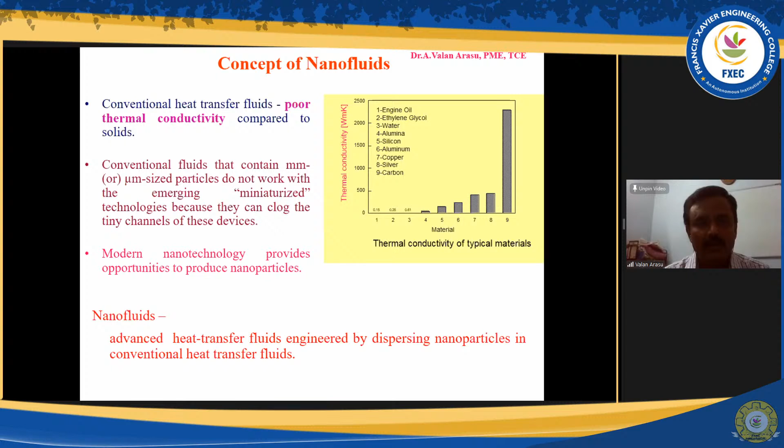But there are certain drawbacks. In this slide you can see the thermal conductivity of solid particles like copper, gold, silver, aluminium—this metallic particles—and non-metallic solids like diamond, silicon carbide, silicon, and metal oxides like aluminum oxide. And lastly, we have conventional heat transfer fluids: water, ethylene glycol, engine oil. These heat transfer fluids have inherently very low thermal conductivities compared to solids.

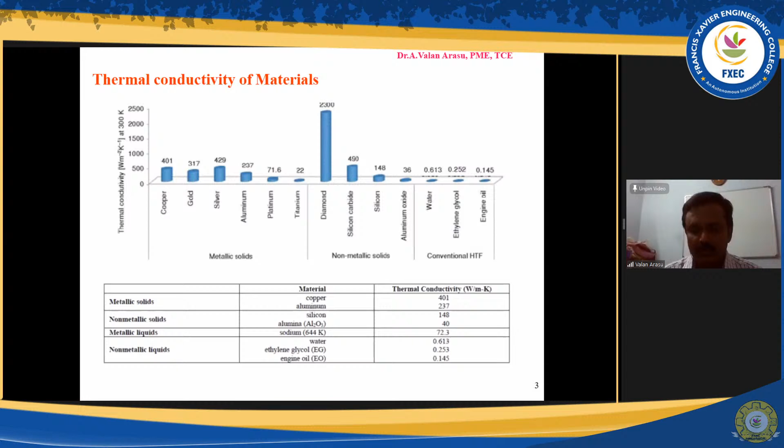So by adding these solid particles, which have high thermal conductivity, into the heat transfer fluid, the effective thermal conductivity of the fluid can be increased. As I said, the feasibility of using solid particles in heat transfer fluid was investigated by several researchers previously.

Some drawbacks with this technology or method: because the particles are of larger size, millimeter or micrometer size, the particles settle quickly. So it forms a layer on the surface, thereby acting as a barrier to heat transfer, and the heat transfer capacity is reduced. To overcome this settlement, we increase the flow rate of the fluid, but this increases the erosion of the heat transfer surfaces, because these larger particles, when they slide over the heat transfer surfaces—the walls of a pipe or duct—result in erosion of the surfaces.

Moreover, we could not use this suspension or mixture in very small cooling channels like narrow channels or micro channels. And moreover, the pressure drop of this fluid is higher, because adding these particles, whether microparticle or nanoparticle, increases the viscosity of the fluid. So pressure drop is increased, and since these particles are larger in size, the increase in pressure drop is considerably higher.

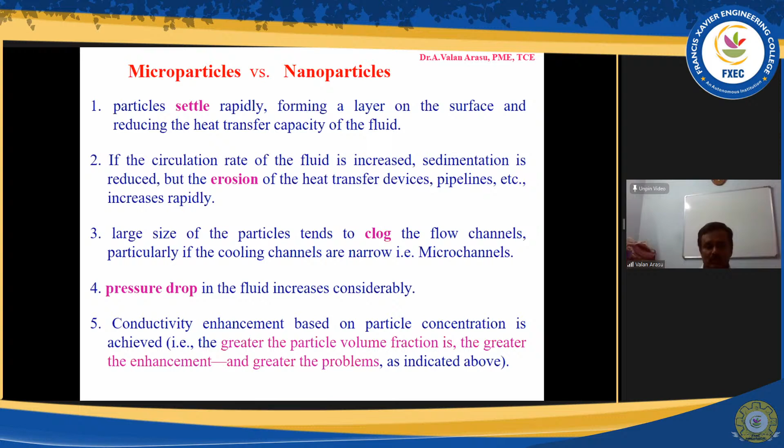settlement problem, erosion problem, and clogging problem, and so on. So to overcome these drawbacks, we moved to the concept of nanofluids.

The nanofluid is possible because of the advent of the scanning tunneling microscope in the later part of the 20th century, around 1980, and the discovery of fullerene, also known as C60, carbon 60 nanoparticle. These two inventions drove the development of nanotechnology, giving us technologies by which we can reduce the size of the particle from micro to nano.

This concept of using nanoparticles was devised by Choi in 1995. So nanofluid is, by definition, a new class of fluids engineered by dispersing nanometer-sized materials, size less than 100 nanometers - nanoparticles, nanofibers, nanotubes, nanowires, nanorods, nanosheets or droplets. These are the different shapes of nanoparticles in base fluids.

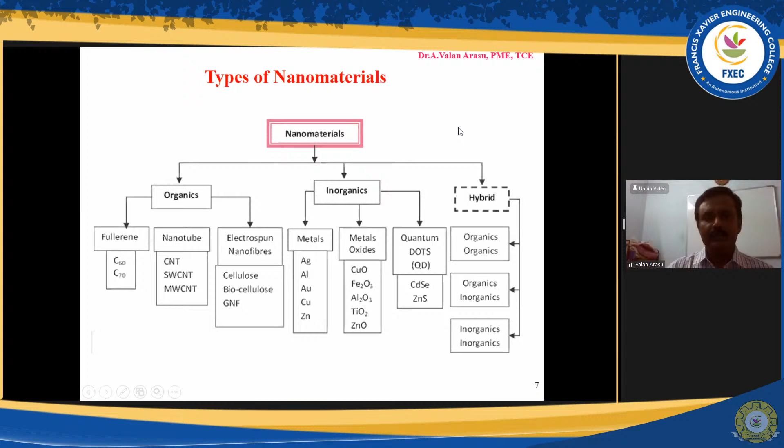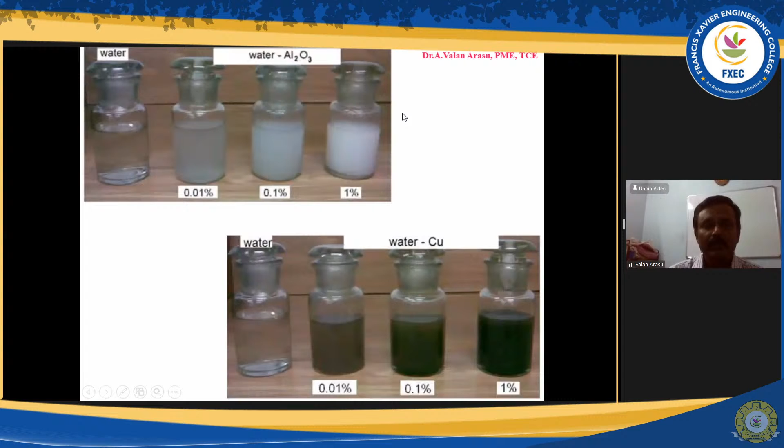So this is the photograph of nanofluid. Water with copper, and this is water with Al2O3.

We have been using this nanofluid as a mixture of solid nanoparticles and basic kinds of fluid, and it is considered as a conventional nanofluid, because there were some developments in the technology of nanofluid.

As I said, we have started using combinations of nanoparticles, either two particles or three particles or sometimes more, either added separately or in a composite form - a nanoparticle combination. That is, a kind of nanofluid where the nanofluid consists of more than one nanoparticle.

As I showed earlier, it could be a combination of metal particles like copper, silver, or metal oxide particles like copper oxide, titanium oxide, SiO2, Fe2O3, or carbon materials, or a combination of any two or three of these different nanoparticles, like copper-TiO2, or copper-CNT, or ZnO-CNT, and so on. So there has been much research work on single nanofluids, and this technology is receiving some greater

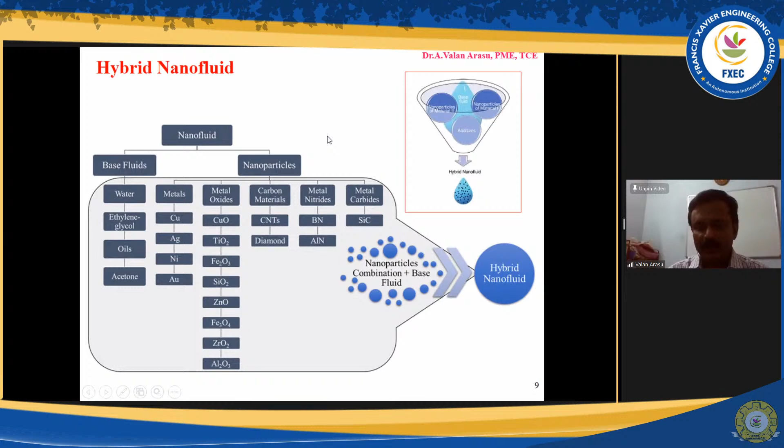And with respect to this nanofluid, we have the bodily fluid called blood. It is composed of blood cells suspended in blood plasma. Blood plasma is liquid.

It accounts for 55% of the blood, and it's mostly water. 92% of this plasma is water. So blood cells like red blood cells, white blood cells, and platelets, the solid particles, are in suspension in this blood. So we can therefore consider the bodily fluid blood as a mixture of solid particles and fluid.

But the size of this blood cell, as we have seen, is larger than the nanoparticle size, and so nanofluid, though it is a mixture of solid particle and fluid, since the solid particles are of very small size, we consider it as just a fluid. Moreover, it is added in very low volumetric fraction or weight fraction compared to the volume or weight of the base fluid. So therefore, we have given it the name nanofluid.

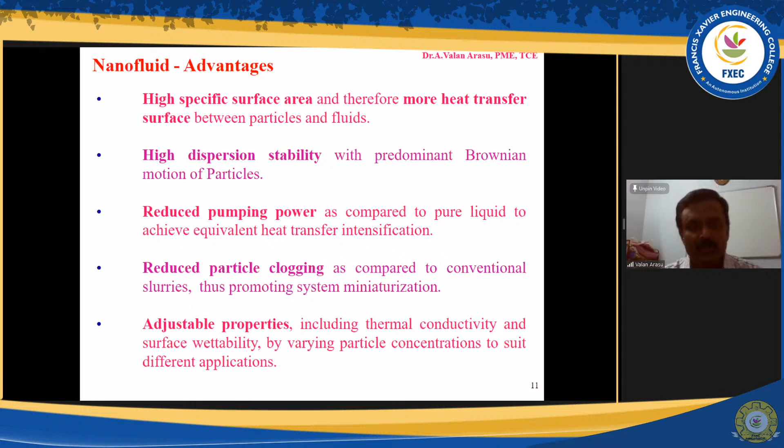The properties of the nanofluid can be adjusted by changing the concentration, size, or shape of the particles. So we can customize the properties as required and use them accordingly. So these are the advantages of nanofluid.

So what is the effect of this nanoparticle on the thermophysical properties of the base fluid? When these nanoparticles are suspended in the base fluid, they increase the convective heat transfer coefficient, increase the thermal diffusivity, increase the viscosity, and increase the thermal conductivity.

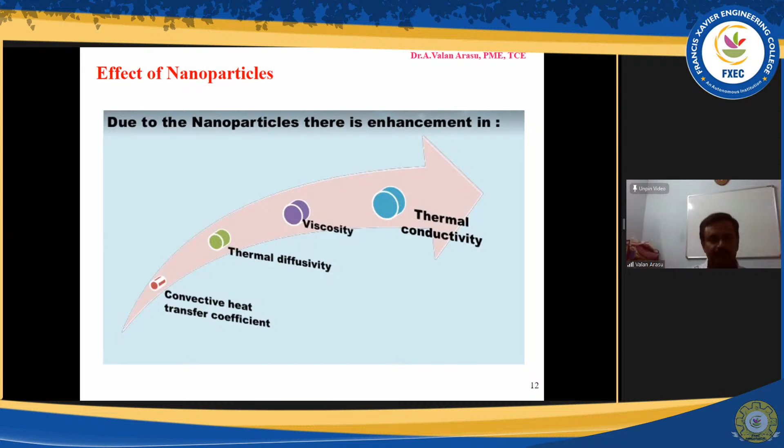How is this nanofluid prepared? We have two different methods: a single step method and a two-step method. In the single step method, the nanoparticle preparation as well as the mixing of the nanoparticle in base fluid are done simultaneously. So the nanoparticles are synthesized and mixed directly in the base fluid, all in one step.

The other method, two-step method, has the two processes done at different stages. In the first stage, we synthesize these nanoparticles, or procure them commercially available. Then these nanoparticles are dispersed using dispersion equipment like magnetic stirrer, sonicator, or homogenizer, with the base heat transfer fluid. The one-step method is more suitable for metallic nanoparticles or nanofluids based on metallic nanoparticles, whereas the two-step method is suitable for non-metallic based nanofluids.

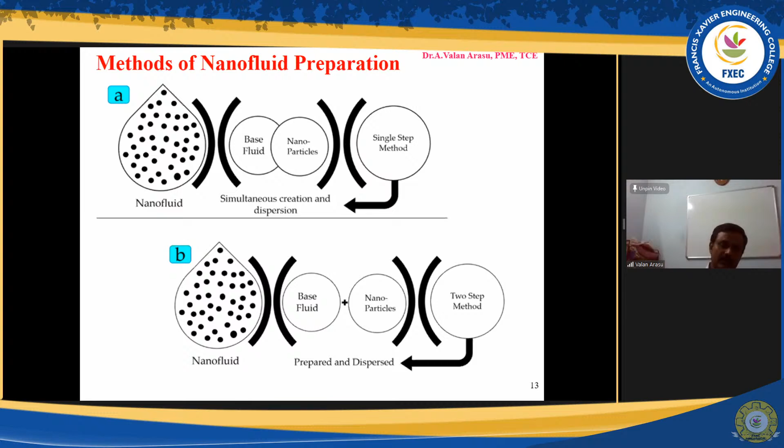This is the single step method. There are many methods, and I have shown here two: vapor deposition method and laser ablation method. In both, this is the bulk material. This nanomaterial, in the vapor deposition method or laser ablation method, is evaporated by heating the material. This vapor goes into the base heat transfer fluid, and the vapor gets condensed, losing its heat to the fluid. So we have a cooling system to cool this fluid. The nanoparticles are evaporated and condensed in the base heat transfer fluid.

Similarly, in the laser technique, the laser is bombarded upon the bulk material, the nanomaterial which is to be mixed in the base fluid, within this solution. As a result of this laser beam, the particles are split into pieces, and these pieces get mixed with the base fluid.

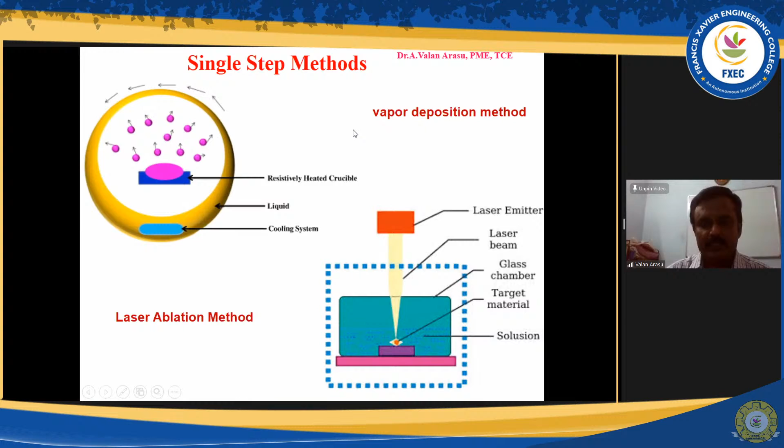Whereas in the two-step method, the required amount of nanoparticle is weighed or measured using a high accuracy weighing machine, and then it is mixed in the base fluid. For mixing, we use a magnetic stirrer, homogenizer, or sonicator, either all three or any two, depending upon the material we use or the stability required.

We prepare the nanofluid by this two-step method, which means we either use nanoparticles available in the market or we synthesize the nanoparticle. So preparation is done ahead of mixing, and then the mixing is done. Unlike the single step method where we do simultaneous preparation and mixing of nanoparticles, here they are done in stages.

And of course, to improve the stability of this suspension of nanoparticles in base fluid, we use a surfactant or dispersant. For example, this is the nanoparticle, graphene nanoparticle, and distilled water is the base heat transfer fluid. Then this surfactant is also added to the mixture during the probe sonication or homogenization process.

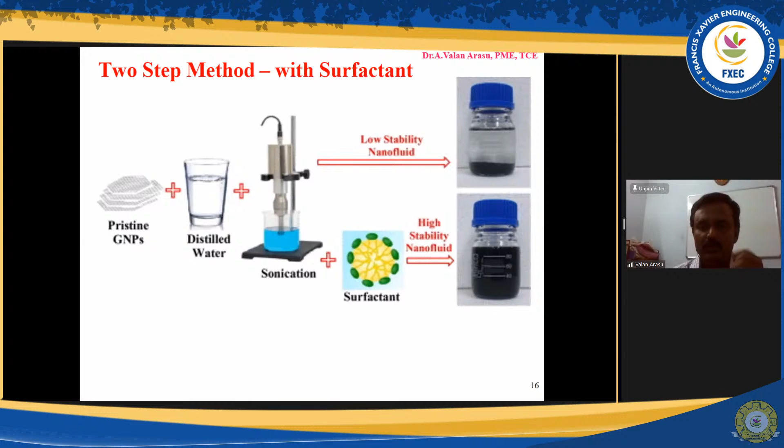If we don't use this surfactant, you can see after preparation of the nanofluid, the nanoparticles will get settled down, because the nanoparticle will have the tendency to form clusters and agglomerates, forming large size particles which will settle down by gravity.

But when we use this surfactant, we can improve the stability of the nanoparticles, so the nanofluid will have good stability. This is one of the important aspects of nanofluid, so we have to seriously consider this while preparing the nanoparticles. We have to do this stability study before we put the nanofluid into use. So this is about the two-step method.

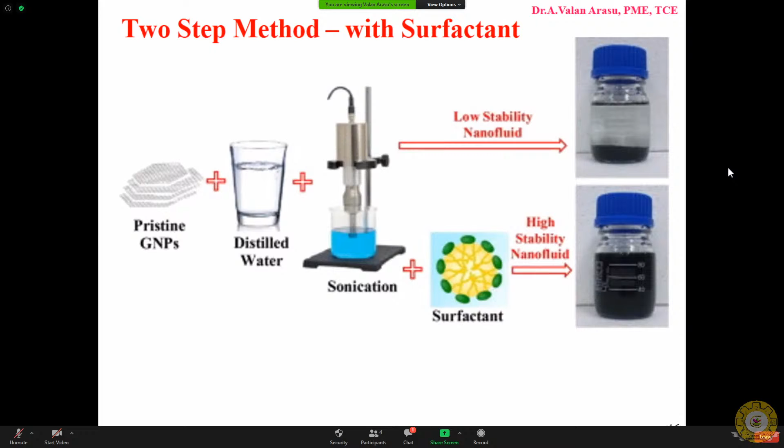The nanofluid possesses enhanced thermophysical properties like density, specific heat, thermal conductivity, and viscosity. But all these properties influence the heat transfer performance of the nanofluid, and the enhancement in these properties depends on the base fluid type, whether we use water or oil or

ethylene glycol, or additives like surfactants, and then the nanoparticle material, whether it is metallic, non-metallic, or carbon-based, then concentration of nanoparticles, size and shape of the nanoparticle. The size of the nanoparticle ranges between 1 to 100 nanometers, and shape could be sphere, cylinder, rod, or fiber. So the particle may be the same, but if the concentration is different, or the size or shape is different, it will have a different influence on the nanofluid properties.

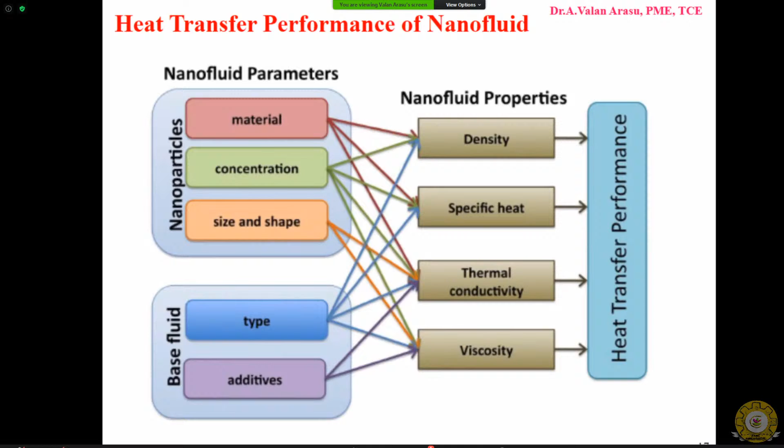So this shows how the nanofluid's thermal conductivity is affected by different parameters like nanoparticle concentration, size, shape, and nanoparticle thermal conductivity. Because metal has high thermal conductivity and metallic oxide has low thermal conductivity, naturally if you add metal nanoparticles, the thermal conductivity is higher compared to the nanofluid with metallic oxide nanoparticles. Also the base fluid type, nanofluid temperature - as temperature increases, thermal conductivity increases - and preparation technique.

So it depends how we prepare and the stability of the nanoparticles over a period of time. All these factors affect the thermal conductivity of the nanofluid.

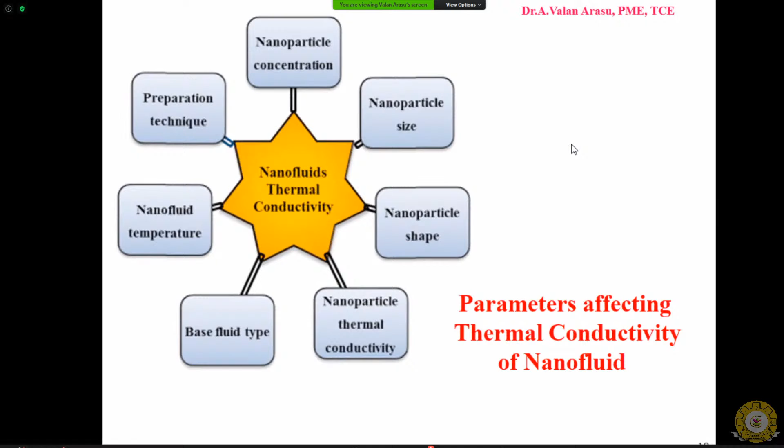Similarly, viscosity of the nanofluid also depends on various parameters like viscosity of the base fluid, temperature of the fluid, morphology of the nanoparticle which is the shape, size of the particle, shear rate, and volume concentration of nanoparticles.

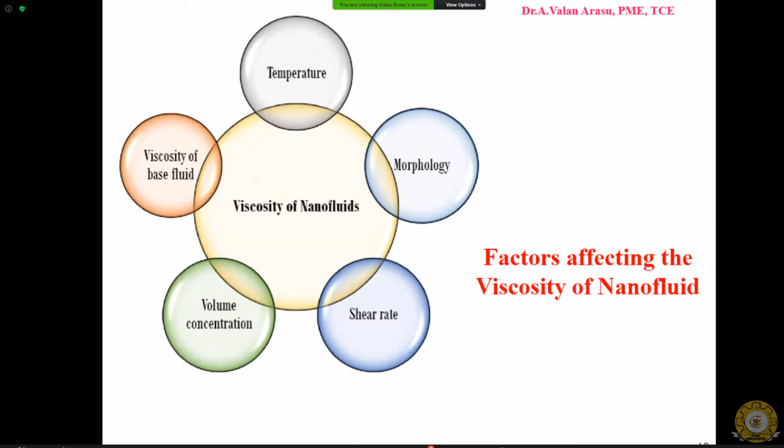So one has to carefully consider all these performance influencing parameters so as to get the desired heat transfer enhancement. And here the pressure drop of water, the base fluid or pure water, and the nanofluid is

compared. You can see the pressure drop of the nanofluid, because of the increase in viscosity, is higher than the base fluid. This means the power requirement is increased, because higher the pressure drop, greater the pumping power required, so a larger capacity pump is required. This is when we compare for the same velocity of the fluid, both base fluid as well as nanofluid.

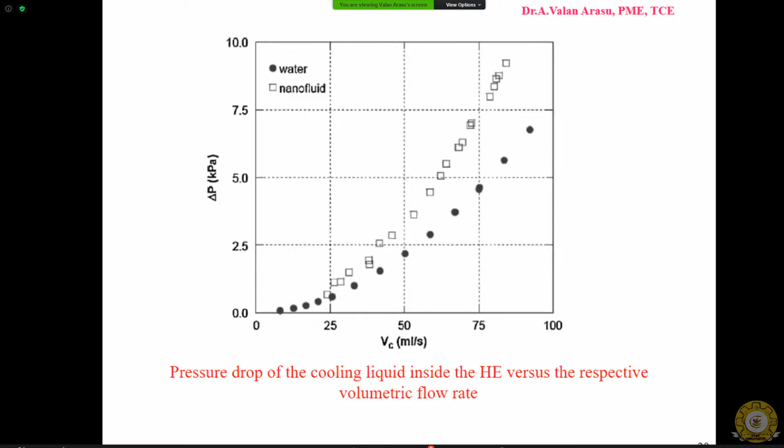But when we compare this with respect to the heat transfer enhancement, we'll find that the pressure drop is same or even less for this nanofluid sometimes.

So there are some challenges of nanofluids. The common challenges are given here. The first challenge is nanoparticle dispersion agglomeration, and second is nanoparticle stability, then viscosity. Viscosity is increased, so increase in viscosity increases the pumping power, and in convection heat transfer, increase in viscosity affects especially natural convection heat transfer.

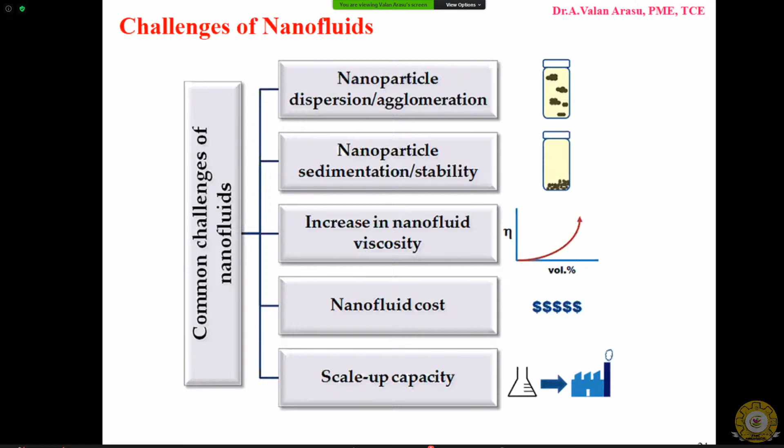The Grashof number is affected, reduced, so natural convection is inhibited, and the viscosity of the heat transfer fluid is increased. And the nanofluid cost is high because of these nanoparticles and the surfactant required. So cost of the nanoparticle is more, and the production of these nanoparticles is also to be scaled up, because so far we do it at laboratory level synthesis of these nanoparticles. So we have to improve this preparation of this particle source so different nanoparticles are available in the market.

So among these challenges, this stability dominates. So we have to pay attention to this stability of nanoparticles.

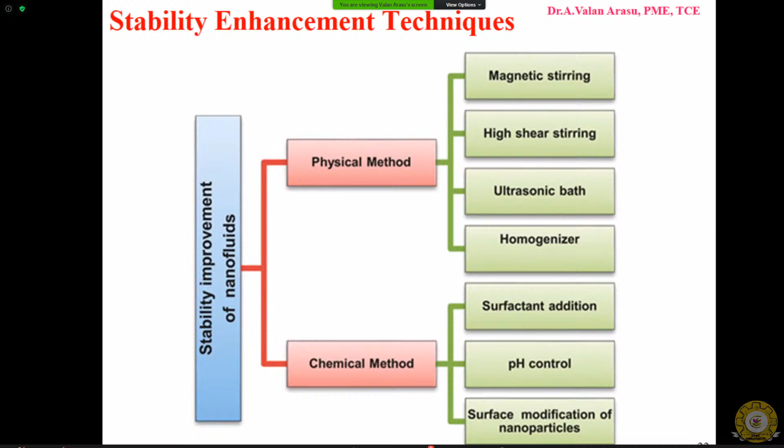So to improve or enhance the stability of nanofluids, we have different methods like physical method and chemical method. In physical method, we use magnetic stirring or shear stirring, ultrasonic bath homogenizer. So when we prepare these nanoparticles by optimizing the time of nanoparticle or nanofluid preparation, we can ensure or enhance the stability of the nanofluid, or by using chemical methods by controlling the pH value of the base fluid, or adding surfactants, or modifying the nanoparticles, called functionalized nanoparticles. We can improve the stability of the nanoparticle suspension in nanofluid.

So that is the first part of the lecture. We have seen the different types of nanofluids and preparation of these nanofluids, the thermophysical properties of nanofluids and factors influencing the thermophysical properties, and challenges of nanofluids, stability of nanofluids.

So let us now discuss the application of nanofluids in solar energy utilization. If you look at the application of nanofluids in literature, you'll find a very wide range of application of nanofluids. It says that it is used in different fields, as I have shown here.

Since the topic is about solar energy utilization, it's used in solar thermal applications, automobile applications, electronic cooling applications, medical applications, detergency applications, military applications. This is only a sample list, but there are many more applications of nanofluids which you can find in the literature, because we are primarily concentrating on nanofluid as a heat transfer fluid.

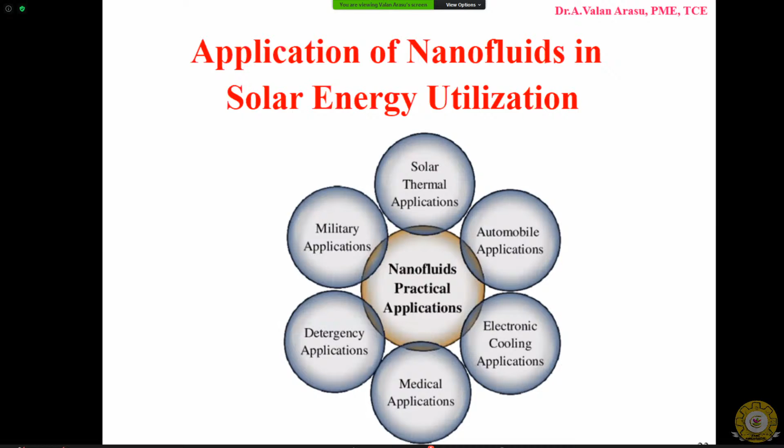Let us first discuss how this nanofluid is used in water heating, solar water heating applications. So one of the important components of solar water heating is the solar collector. Solar collector could be either non-concentrating collector or concentrating collector. So nanofluid could be used in any type of collector.

So to improve the heat transfer rate, the heat transfer that occurs within the heat transfer absorbing surface, which absorbs the solar radiation, and then this absorbed solar radiation is transferred as heat to the heat transfer fluid. So by using this nanofluid instead of conventional fluid like water or a mixture of water and ethylene glycol, we can improve the efficiency of the water heater.

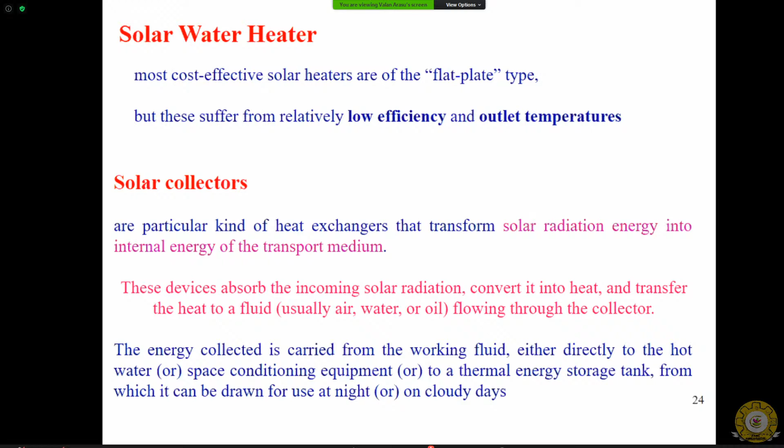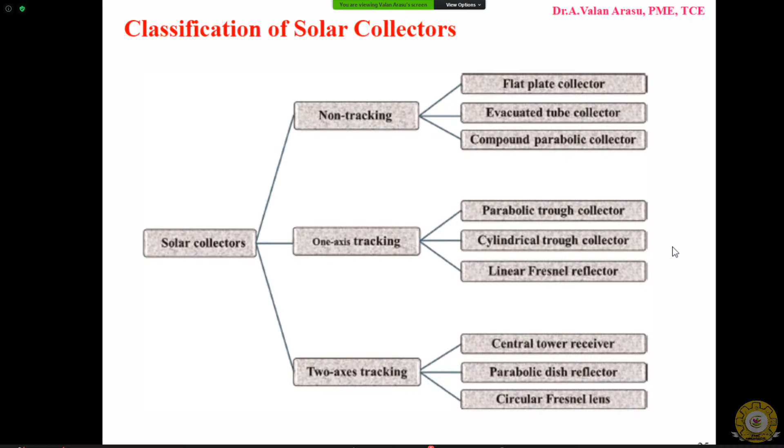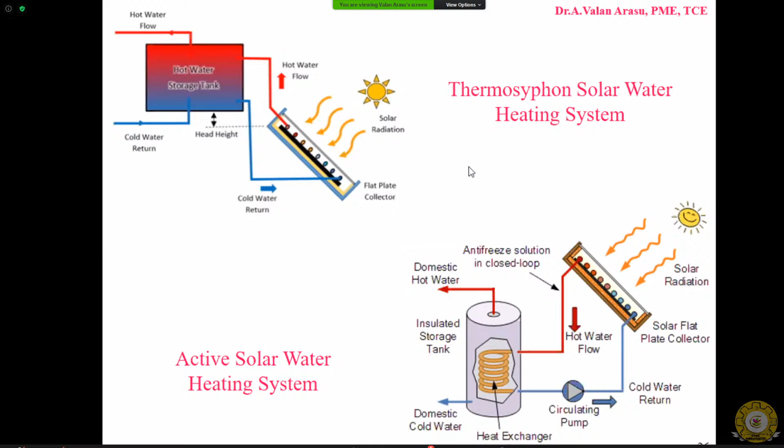A solar flat plate collector is simply a flat plate. Underneath it, there are heat transfer pipes made of copper, brazed or soldered to a black-coated absorber plate, so that solar radiation falling on this flat plate is absorbed and the temperature of the absorber plate increases. This absorbed heat is then transferred to the water flowing through these copper pipes. To prevent heat loss from the bottom and sides, the solar collector is well insulated on the sides and bottom.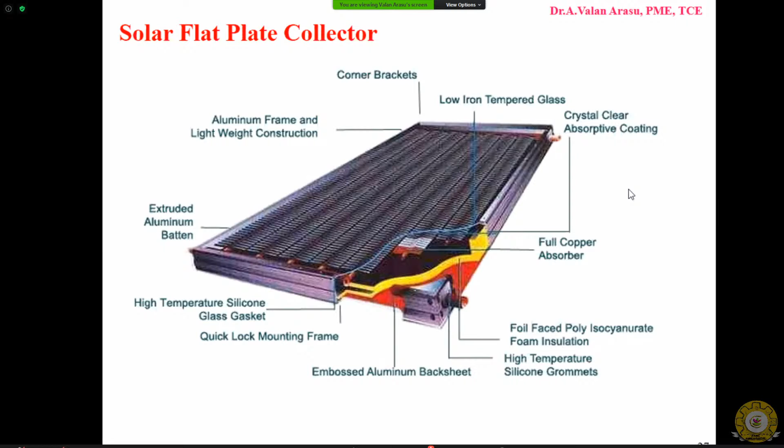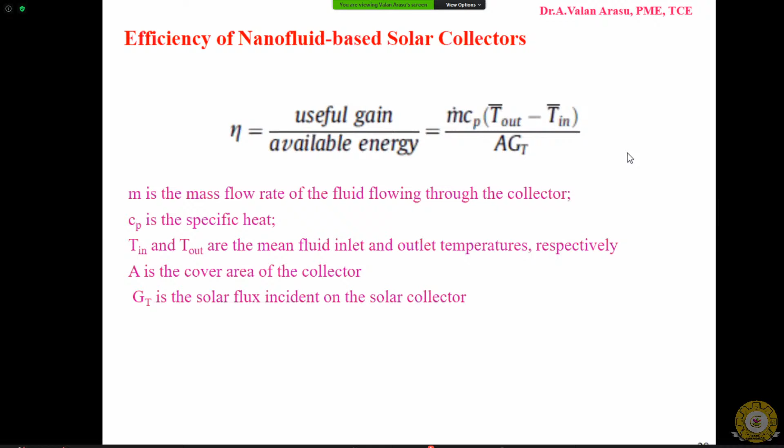So this is the solar flat plate collector, and the efficiency of this collector is given by the useful heat gain, measured by mCp delta T, where delta T is the change in temperature of water, Cp is the specific heat of water, and m is the mass flow rate of water, divided by the heat input, which is the available solar energy, A into GT. A is the area of the absorber plate, and GT is the solar flux in watts per meter square incident on the solar absorber plate.

This is the characteristic curve of any flat plate collector. Instead of water, Al2O3 metallic oxide nanoparticle-based water is used, with different particle sizes and different weight concentrations like 0.2% and 0.4%, with particle size of 15 nanometers. It is found that the efficiency of the solar collector is greater for 0.2 percent weight fraction compared to 0.4 percent fraction.

And further, when we use a surfactant, the efficiency is further increased.

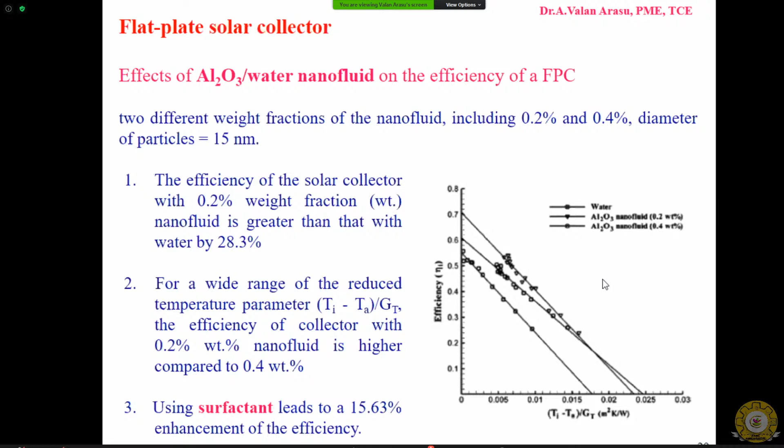Then another nanofluid, multi-wall carbon nanotube water, is used again for different concentrations like 0.4 and 0.2 percent. But for this nanofluid, the increase in efficiency is higher for 0.4 percentage nanofluid, while 0.2 percentage reduces efficiency compared to water.

So we have to ensure that adding nanoparticles does not necessarily improve the heat transfer rate, because adding any solid material to a heat transfer surface will increase the thermal resistance. Similarly, adding nanoparticles does not warrant any increase in heat transfer rate.

So before putting these nanoparticles into use, we have to find the optimum concentration, or the most effective concentration of nanoparticles, through intensive research and extensive experiments.

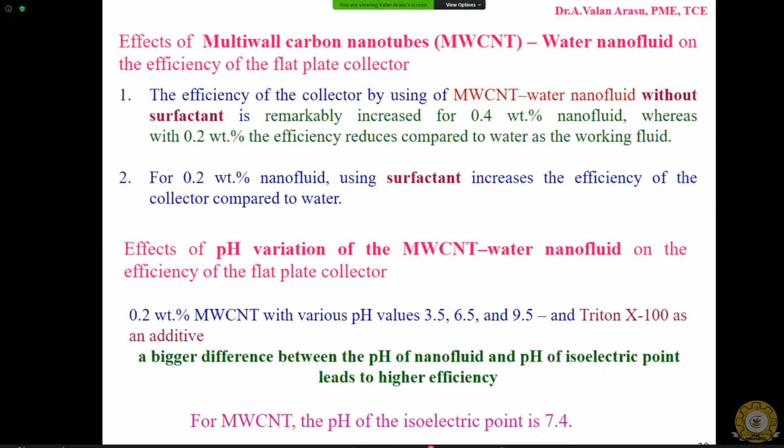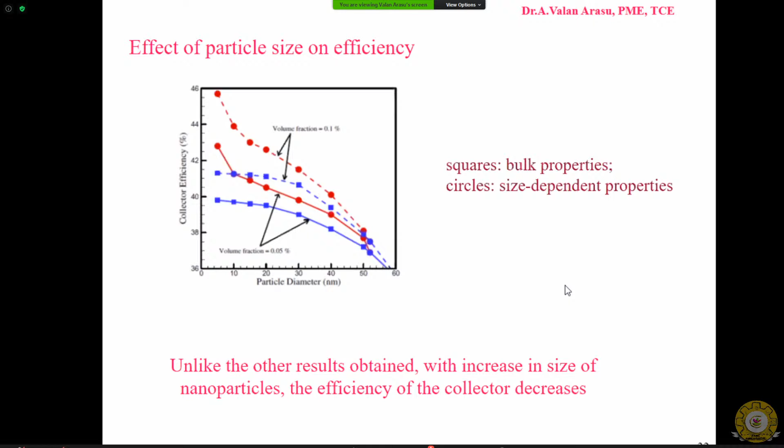So the enhancement in heat transfer and the efficiency of the collector is increased further. The effect of particle size on efficiency is also studied. As particle size increases, the efficiency of the collector decreases. Different researchers have obtained different results. Some researchers found that the efficiency of the collector increases with increase in particle diameter, while this researcher found that as nanoparticle size increases, the efficiency of the collector decreases.

So that is about flat plate collector. The other one is vacuum tube solar collector. To improve the efficiency of the collector further, this vacuum tube solar collector was developed. It consists of a double wall tube, and the inner wall of the inner tube is coated with some good absorbing material. At the center of this double wall tube, we have a copper pipe.

So either we can use this water to be heated directly in the inner tube, or we can pass water through the tube, or we can use this copper pipe as a heat pipe, so that when cold water enters into the tube, it is heated by solar radiation, whether it is heat pipe based vacuum tube solar collector or direct heating vacuum tube solar collector. The water is heated, so it becomes vapor, and the vapor moves upward by virtue of density difference.

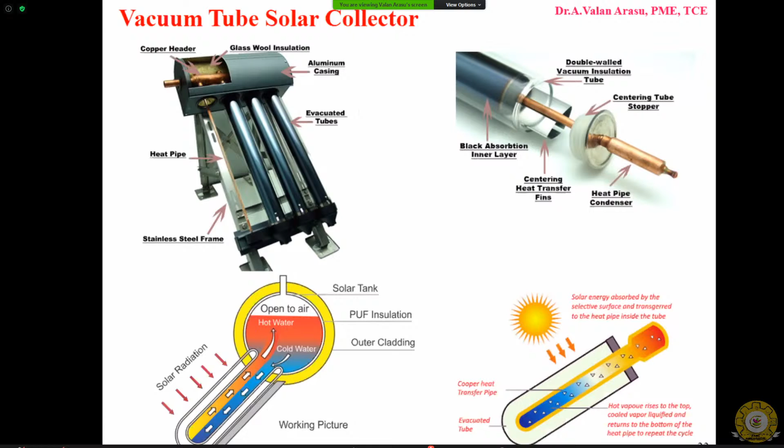But the important advantage of this collector is that the heat transfer surface is completely surrounded by a vacuum pipe, a glass pipe. So there is no fluid in between, so convection heat transfer is reduced, and conduction heat transfer between the tube and the surrounding air is reduced. So heat loss is minimized as compared to flat plate collector. So the efficiency of this collector, though it is costlier, is higher than the flat plate collector.

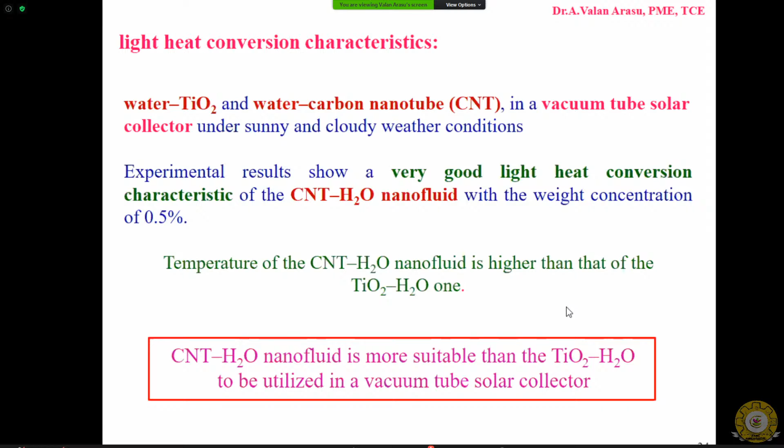The efficiency of this collector was experimentally studied using nanofluids: water-titanium oxide and water-carbon nanotube nanofluids. It was found that the carbon nanotube based water nanofluid has very good light heat absorption and conversion characteristics. The temperature of water obtained from this CNT nanofluid is higher than that of titanium oxide based water. So this study confirmed that CNT-based water nanofluid is more suitable for vacuum tube solar collector applications.

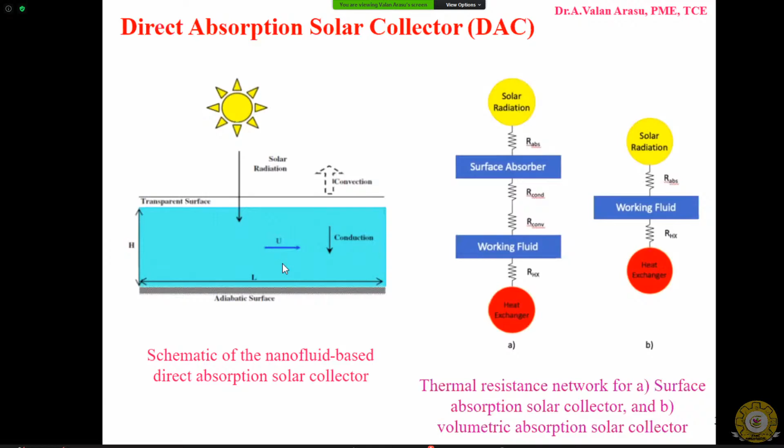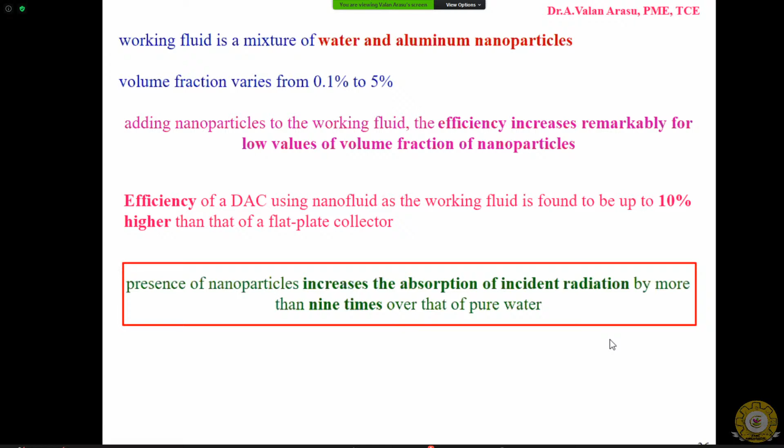So application of nanofluid is tried in this direct absorption solar collector. Instead of using just water, we can use carbon nanotubes, water, aluminum nanoparticles, with volume fraction of 0.1 to 5. Efficiency was found to increase remarkably for low values of volume fraction. The difference between this nanofluid and base fluid is because the presence of nanoparticles increases the absorption of incident radiation. These particles absorb the solar radiation, so the heat transfer is therefore increased, about 9 times that of pure water, and efficiency is increased by 10% as compared to flat plate collector.

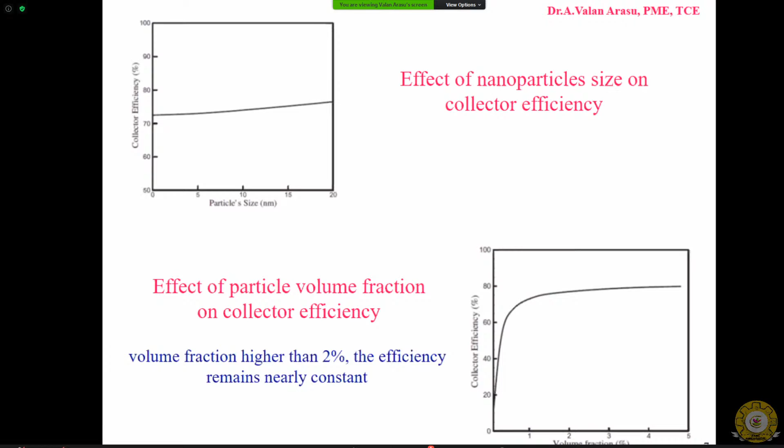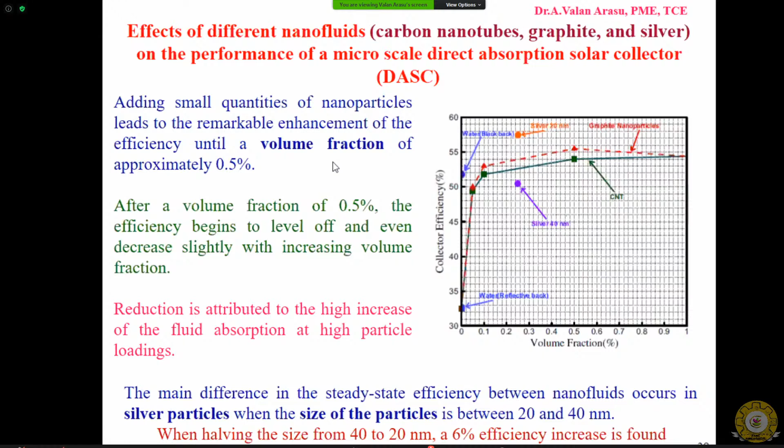And then solar concentrating collectors. So in the previous types of collectors, the solar radiation is not concentrated. It is used as it is received. But we have concentrating collectors like parabolic trough, linear Fresnel, then paraboloid or dish type collector, and central receiver type collector. So in these collectors also we use heat transfer fluid.

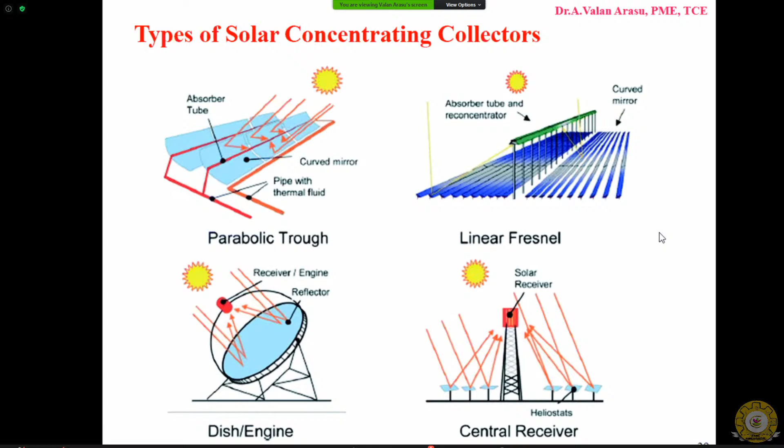So these are the receiver pipes. The parabolic trough, this is the receiver absorber pipe tube for the linear Fresnel system, and this is the receiver of this paraboloid collector, and this is the tower concept or central receiver. The absorber is located at the top of the tower, surrounded by these mirrors or the heliostats.

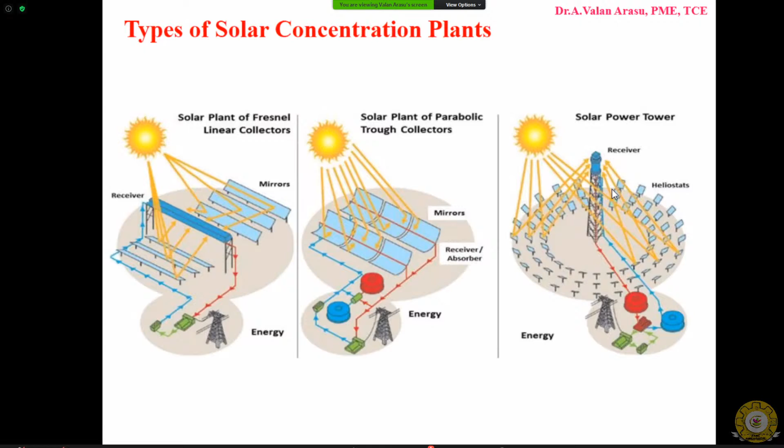So this is a parabolic trough collector, which uses a reflector and a receiver tube or absorber tube. The absorber tube is located at the focal point of this parabolic trough, so it is a line focusing collector. So the incident solar radiation, especially direct radiation falling on this reflector, is reflected onto this receiver. So that is how the solar energy is concentrated. So these are the four important types of concentrating collectors.

So solar energy falling on a large area is concentrated on a smaller area. So the concentration ratio is defined as the ratio of the aperture area to the absorber area, the collector aperture area to absorber or receiver area. Normally the aperture area is the projected area on a horizontal plane, so it's much higher than this receiver area, absorber area.

So concentration ratio of these concentrating collectors is normally high as compared to flat plate collector. For flat plate collector, the concentration ratio is 1, because the aperture area or absorber surface area as well as the receiver area are one and the same. So concentration ratio is 1.

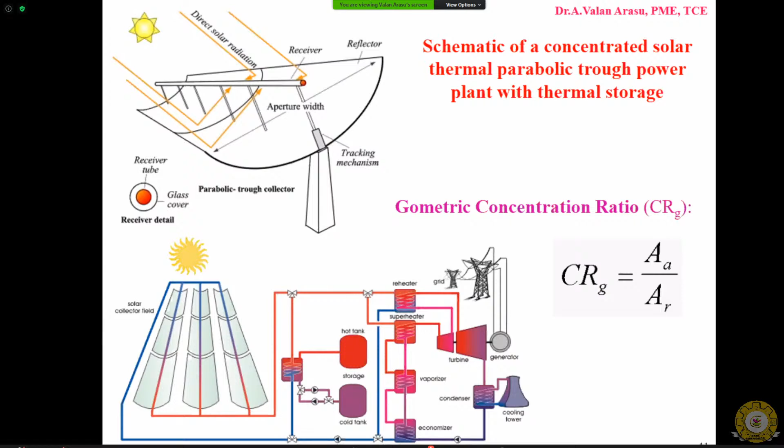So the concept of using nanofluid in concentrating solar collectors has also been tried. It was found that the use of nanofluid in receiver improves the efficiency of the collector by 10% when compared with conventional concentrating solar thermal systems.

The nanofluid used is graphite, because this is a high temperature system. Because of concentration, high temperature can be achieved - more than 100 degrees Celsius, up to very high degree Celsius, 400, 500, even higher. Oil is used as the heat transfer fluid, Therminol, so one of the heat transfer oils used in concentrating collectors. So graphite is the nanoparticle added to this Therminol in the volume fraction of 0.001%.

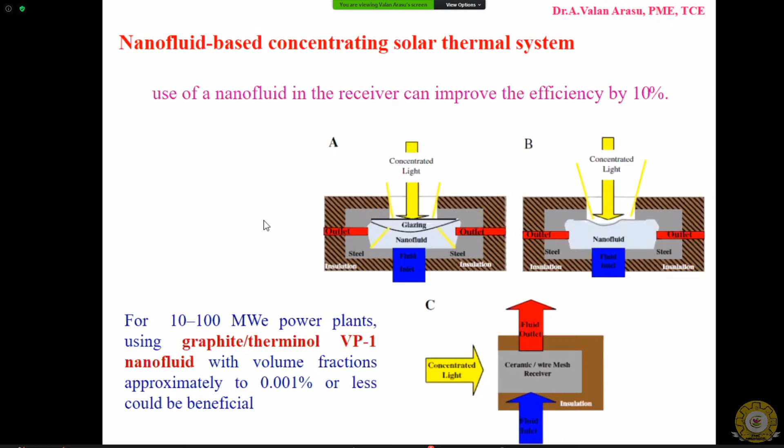So this picture shows, by using nanofluid instead of conventional fluid in concentrating systems, we can improve the efficiency of the collector by say 5 to 10%.

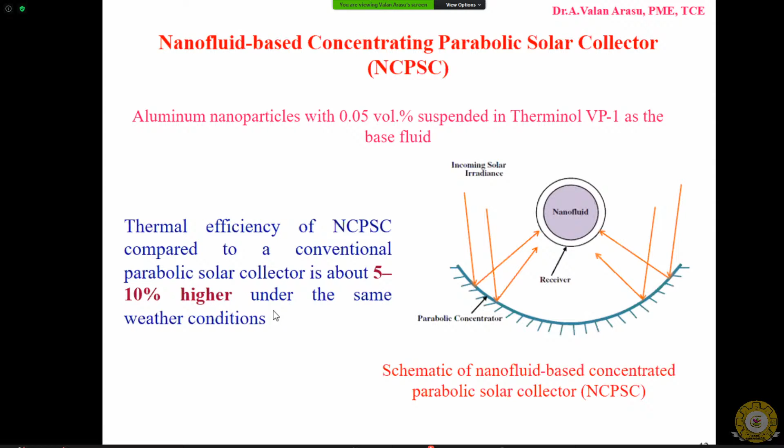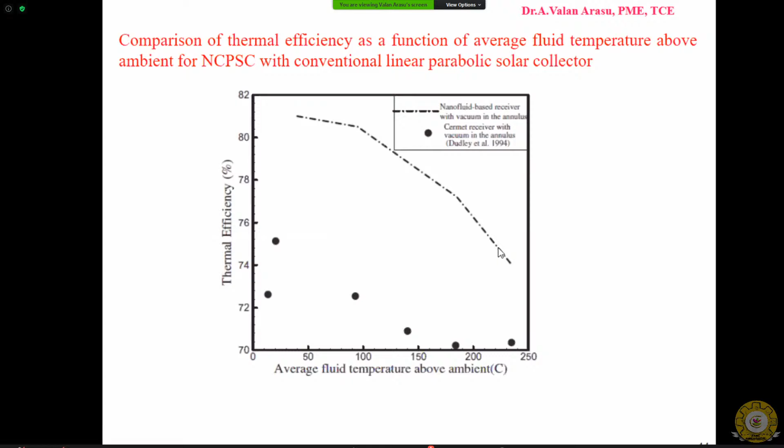So this graph shows the enhancement in efficiency. These dots show the efficiency of ordinary concentrating collector, parabolic collector, and this shows the efficiency of the nanofluid based parabolic trough collector. So that is about solar thermal collectors.

Another important application of solar energy is converting solar energy directly into electrical energy using photovoltaic cells. So a single cell, a semiconductor device, can generate 0.5 to 1 volt at a current density of 20 to 40 milliamps per centimeter square.

So when light energy falls on this semiconductor material, and when the light energy is more than the band gap energy, the electrons are excited, so they are able to move across this PN junction, from P-type semiconductor to N-type semiconductor, resulting in flow of electrons. So when you connect these solar cells to any load, you have current flow from P to N.

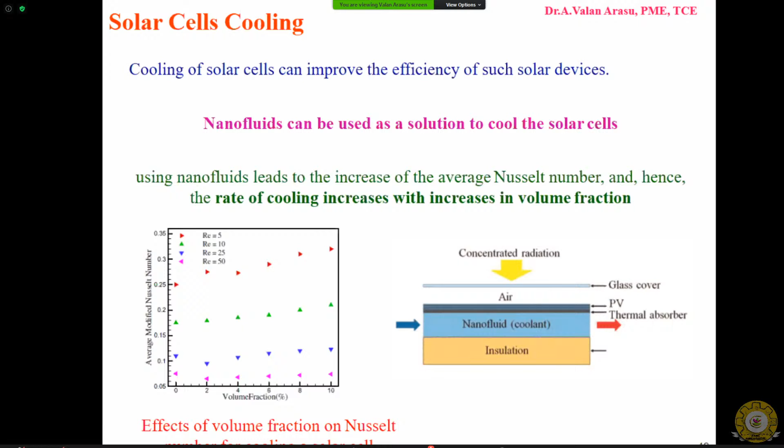So when the temperature of the photovoltaic cell is kept under control, the efficiency of the cell is increased, or remains unaffected by the increase in temperature of the solar cell.

The other application we can use nanofluid for is as an optical filter. The nanoparticles, having good optical properties, will filter out unwanted wavelengths of solar radiation. That is, they prevent radiation outside the required range of wavelength, while allowing the desired range of wavelength to pass through.

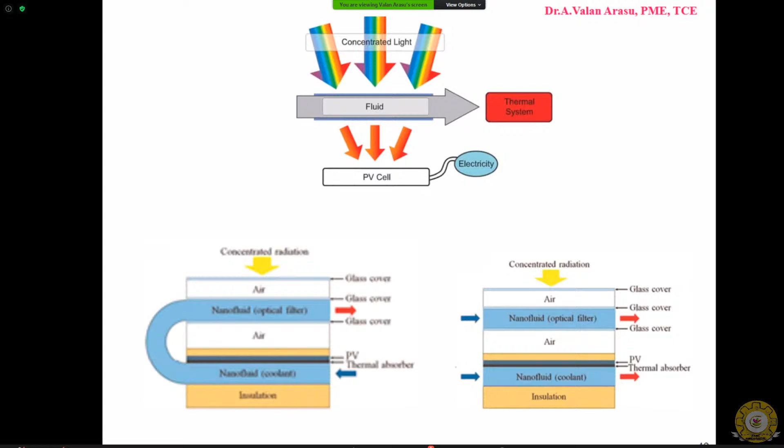So they are used as an optical filter, and by absorbing solar radiation, they become hot, so they are also used as a coolant. Besides generating solar cell electricity, we can also generate thermal energy. So simultaneous generation of electrical energy and thermal energy is possible with the application of this nanofluid.

And these are some of the future works. Still, much more work needs to be done with respect to the collector, especially the parabolic trough collector and the photovoltaic thermal systems. So a lot more work has to be done.

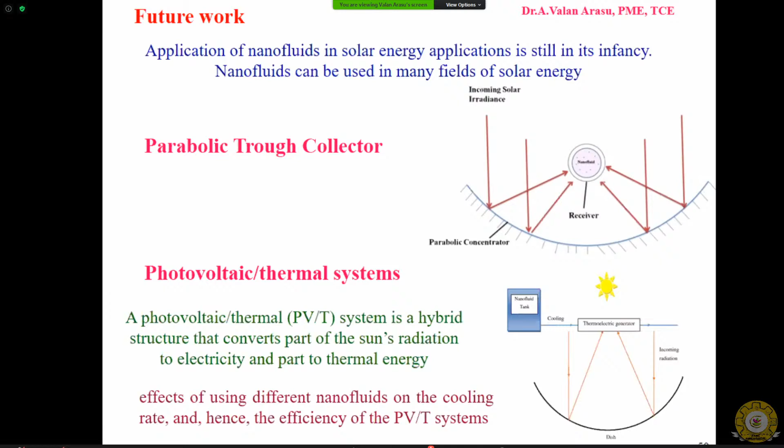Another application of nanofluid is solar still. We know that the scarcity of drinking water is increasing day by day. Nearly 2.8 billion people currently have no access to safe drinking water. So we can use this solar still to produce fresh water from salt water.

When solar radiation strikes the bottom plate coated with some good absorbing material, it absorbs the solar radiation, and the temperature of the plate increases, which in turn is transferred to the water over the plate. So the water is heated and evaporated, and the vapor, as it rises, comes in contact with the cooled glass plate, because the glass plate is transparent to the incoming radiation.

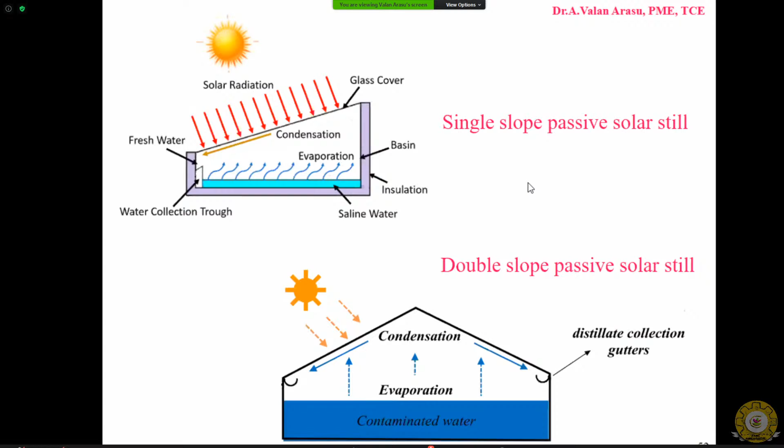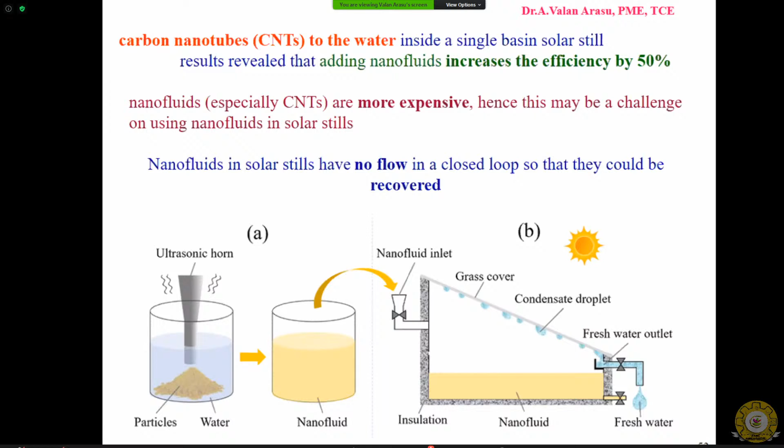By adding nanoparticles to this brackish or salty water, it's found that the rate of evaporation increases, and hence the efficiency of the solar still is increased. Using carbon nanotubes, it was found that the efficiency was increased by 50%. And here there is no loss of nanoparticles, so we can recover the nanoparticle and use it again and again for the preparation of the nanofluid.

Another application of solar energy is the solar pond. It was found that in some natural lakes, because of salt availability at the bottom of the lake, the water at the bottom of the lake remains hot, and the top water layer remains cool.

Normally, when water is heated, it tends to rise up by virtue of decrease in density. But here, since the water is salty, because of the naturally occurring salt rocks available at the bottom of the lake, the density of the salt water is higher. So though the temperature is increased due to absorption of solar radiation, it remains at the bottom. This mechanism is used in the solar pond.

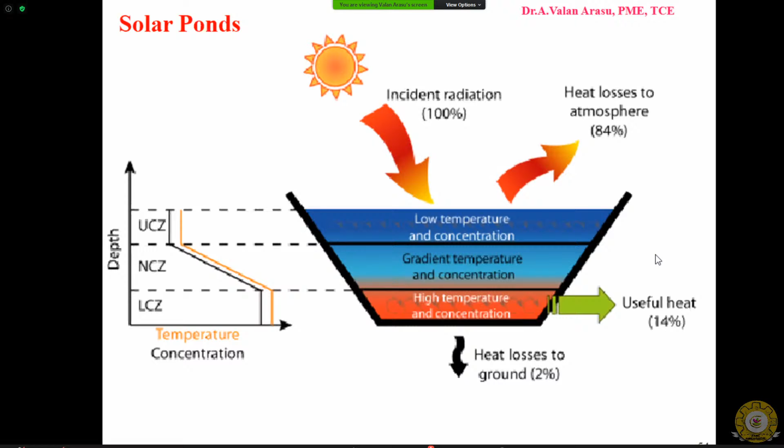So we have three different layers: low temperature or low concentration layer, gradient temperature or gradient concentration layer, and the bottommost layer is called high temperature or high concentration layer. So upper convective zone, non-convective zone, and lower convective zone are the three different zones of this solar pond. By maintaining different salt gradients, we can maintain hot fluid at the bottom compared to the temperature of the fluid at the top.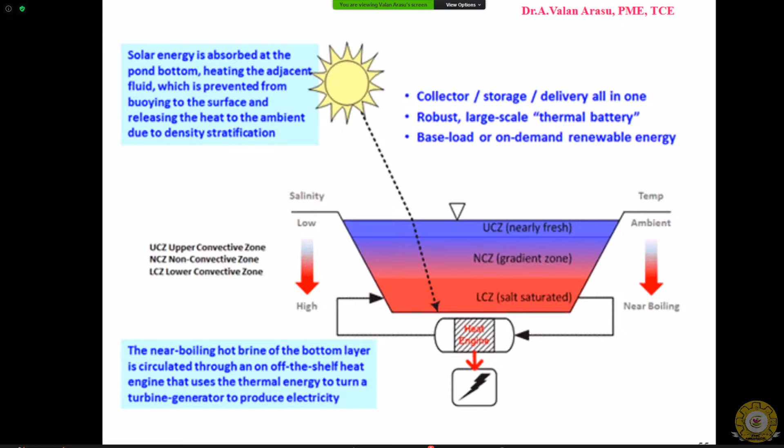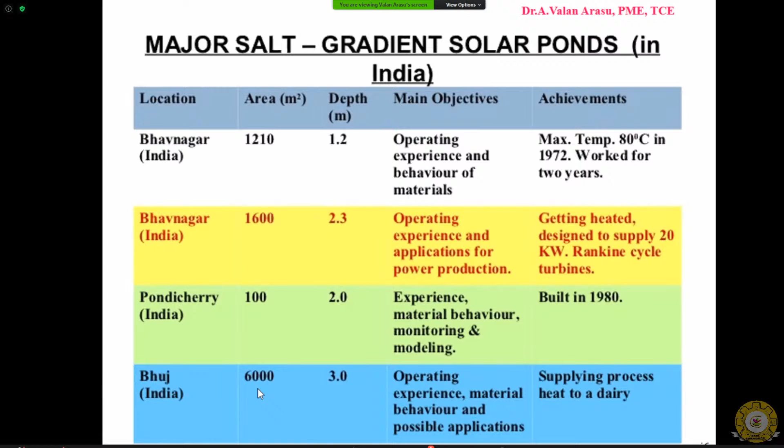So the solar energy collected by this bottom layer could then be extracted. These are the major salt gradient solar ponds available in India. In Bhuj, we have an area of 6,000 meters square, depth 3 meters. So these are the solar ponds.

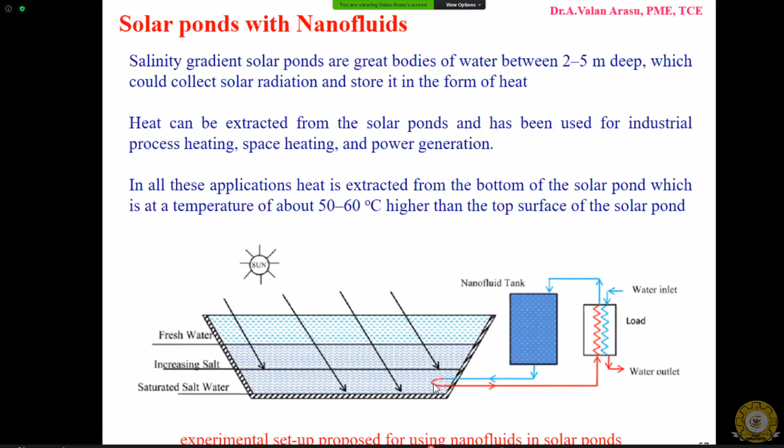So here we either use nanofluid directly mixed with the salt water in the pond, which requires a large quantity of nanoparticles, or we can use this nanofluid to absorb the heat stored in the solar pond. A solar pond is a collector as well as a storage device. It collects solar energy as well as stores it. So the stored energy can be retrieved using this nanofluid.

So we have seen some applications of nanofluid in solar thermal systems like solar collectors, direct absorption collectors, concentrating collectors like parabolic trough collectors, and then solar cells, solar stills, and solar ponds. There are many other applications, but because of the time limit, we cannot discuss the applications of nanofluid in other solar systems.

But the challenges of this are high cost, high pumping power, high pressure drop, instability and agglomeration, erosion and corrosion.

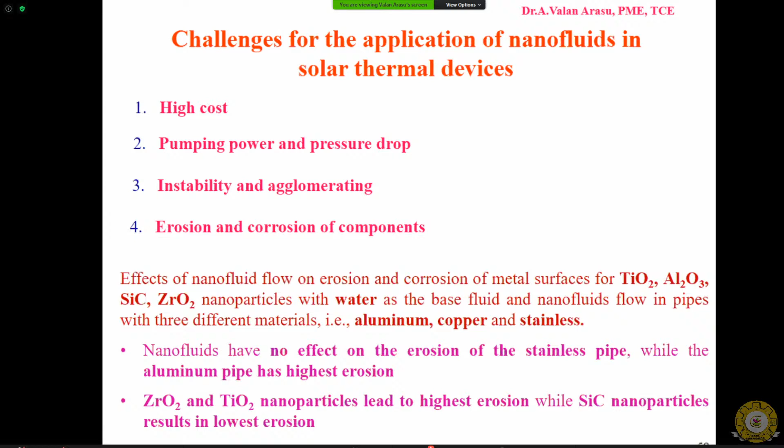So there are two important considerations: economic and environmental. Naturally the nanofluids are expensive because of the nanoparticle requirement and addition. So capital cost of the nanofluid is higher, and maintenance cost is also higher because we have to ensure the nanofluid stability.

But there is greater fuel cost saving per year because of the higher efficiency and solar fraction, since using nanofluid in these solar systems improves the efficiency of the system, which saves greater fuel. But since the cost of the nanofluid is higher, the payback period of solar systems using nanofluids is longer.

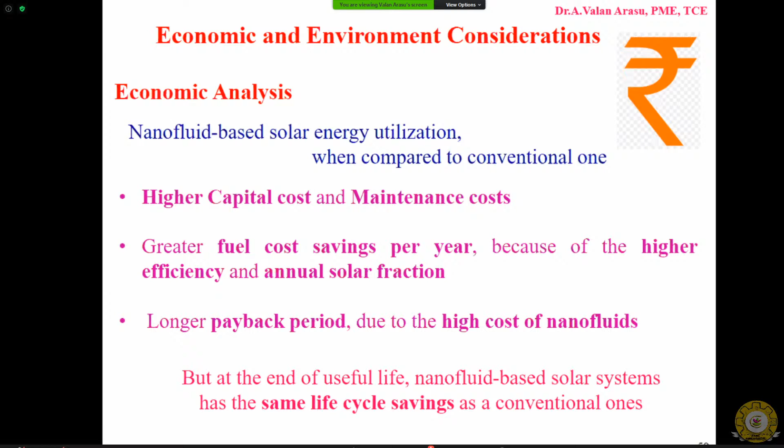That is about economic consideration. For environmental consideration, nanofluid use results in lesser emission of carbon dioxide because the effectiveness of the system is increased. So for the same heat capacity or generation capacity, we need smaller size solar systems. Manufacturing and operation of these smaller systems results in savings of greenhouse gas carbon dioxide.

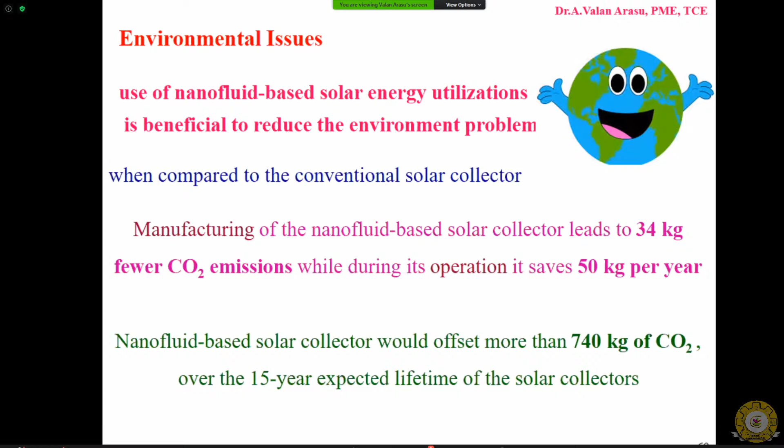So nanofluid-based solar collectors emit about 700 kilograms of carbon dioxide less than a conventional solar collector would emit over a period of its useful life. Normally, 15 years is the useful life of a solar collector.

So I'd like to conclude my lecture saying that there are many points which go in favor of these nanofluids as compared to against their use, because properties like thermal conductivity and thermal diffusivity are enhanced, and hence the heat transfer coefficient is also increased, improving the overall heat transfer performance of the nanofluid.

But as I said, the thermal performance or thermophysical property enhancement depends on a number of parameters, like the concentration of the nanoparticle, size of the nanoparticle, shape of the nanoparticle, type of base fluid, temperature of the fluid, and the surfactant used. These factors affect the enhancement of thermal conductivity in nanofluids, which ultimately affects the thermal performance of any heat transfer system, whether it is a solar system or any other system.